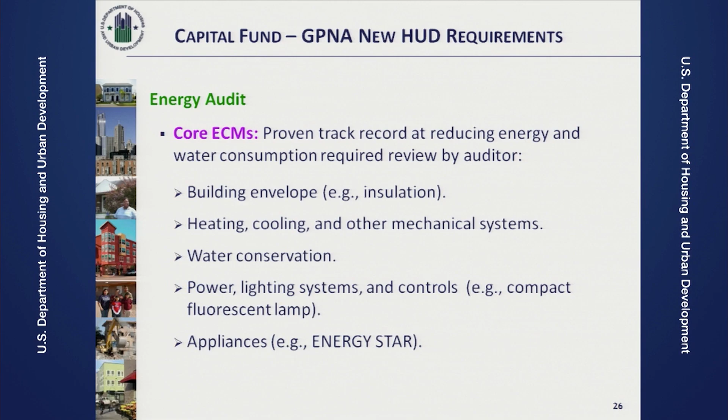Water is a quick payback. Toilets nowadays are 1.6 and 1.2 gallons as opposed to 6 gallons from the old days. Power and lighting systems and controls, like compact fluorescent lights, you notice this when you go to Home Depot anymore, that's getting to the point where that's all you can get. Appliances, purchasing Energy Star appliances - the new capital fund consolidated rule specifically requires you to use Energy Star appliances unless it is not cost effective to do so.

So you have the core ECMs, and then the next thing is advanced ECMs. Advanced ECMs are generally more difficult issues to deal with, like fuel conversion technologies such as energy management systems, or energy generating technologies like renewable energy, solar, geothermal, and one of my favorites is wind powered - I see the windmills out there as I fly across the country. So those are more advanced energy conservation measures.

When you look at your ECMs, one thing we think about is what's the payback - what's the initial cost and how much am I saving each year, so how long does it take to pay back that initial cost. The rule breaks it down into 3 segments: 5 years or less, 5 to 10 years, and greater than 10. This gives you a sense of which ones give you the biggest bang for the buck and pay you back quicker.

That covers all of the basic requirements for the energy audit that we wanted to share with you today. We have a lot of information on our website at www.hud.gov. If you go to Public and Indian Housing, you'll see across the top the capital fund. When you click on the capital fund, there's a drop-down screen with a variety of things like funding as well as the physical needs assessment. You'll find program descriptions, frequently asked questions that are regularly updated, and the GPNA software, or the GPNA tool as some like to call it.

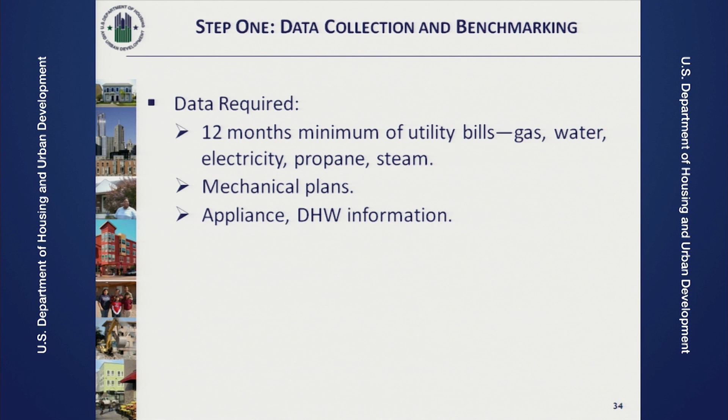All right, so what data is required? Step one is collecting data. Twelve months is the minimum utility bills we need to gather when doing an energy audit. Twenty-four months is preferable, but with twelve months we'll be able to do a profile of the building, looking at not only electricity, but gas, water, and propane or steam, which some of you will have depending on where you're located, and put those all into the calculator. We also want to look at mechanical plans and understand what type of equipment we've got in the building.

In order to do the benchmarking, why are we doing it? Because it's really hard to measure, hard to manage, if we haven't done any measures. So the benchmarking helps us take a first step in determining where this property stands against its peers - is this a high performer, is it a low performer, and really, what's the magnitude of the opportunity? That's what benchmarking allows us to do.

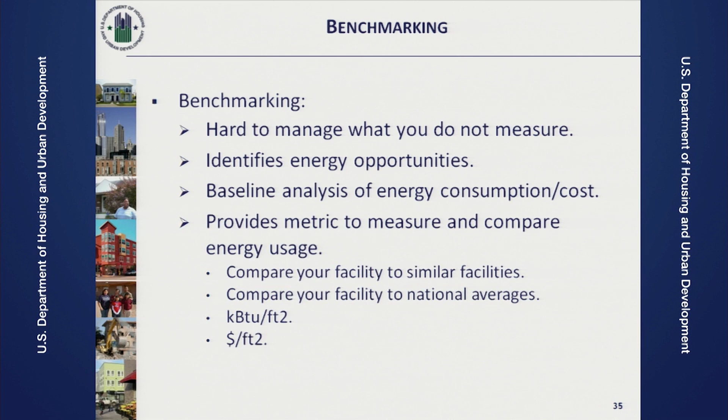The other thing that benchmarking really allows us to do is to take these multiple inputs, gas, electricity, propane, and put them into one common denominator, one common measure, and we call that energy intensity. You'll see at the bottom of this slide that's referred to as kBTUs per square foot. That's a much better measure than dollars per square foot, which depending on where you are in the country could vary widely depending on what you're paying for electricity. If you're in a state that has coal powered electricity, it's very cheap. Other places, much more expensive.

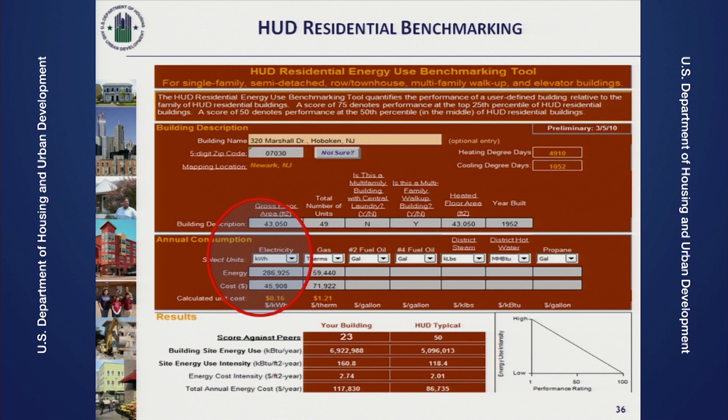So some of you may recognize this slide. This is the HUD residential benchmarking tool. What I've circled here is a couple of the outputs as we're entering data into the benchmarking tool, a couple of the things that are going to be of use later in the slideshow. These are the outputs that are talking about what that energy intensity is, what the usage per square foot is, what the total annual usage is.

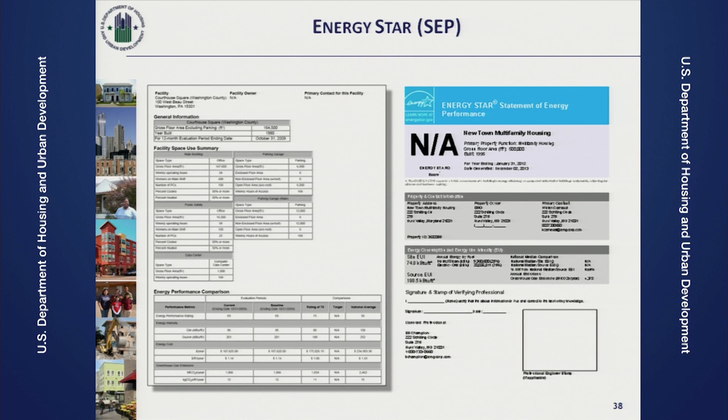This is another acceptable benchmarking tool. HUD is okay with whichever one of those benchmarking tools you use, as long as you're doing the benchmarking.

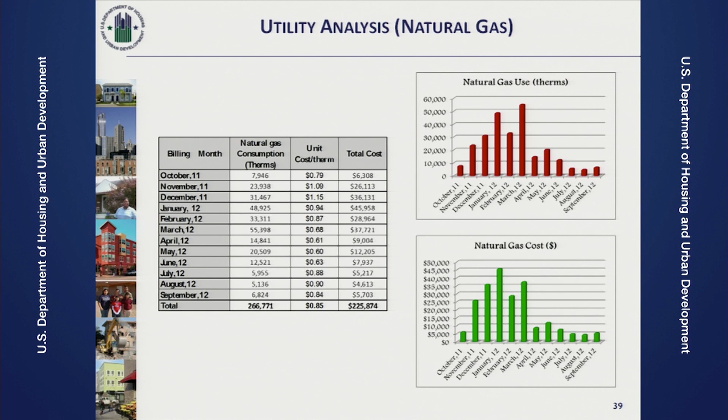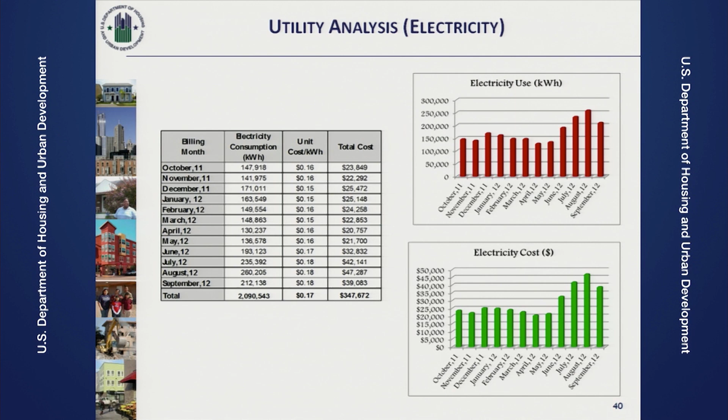This is electricity, and likewise, if you're looking at the spikes in electricity there, that's during air conditioning season. We can easily look at that, and this one actually has a much cleaner profile where you can say, okay, I can predict what the base load in this building is. For electricity, base load is lighting, higher than anything else. Appliances, what we call plug load, comes after that. But it allows us to really take a look at what savings would be from new HVAC, what lighting would likely deliver based on real estimates.

So from that benchmarking and the utility bill analysis, then we go into the actual energy audit. In the energy audit, we're doing a review of all the energy consuming components and coming up with ECMs, energy conservation measures, and ranking them based on payback.

So what happens after the energy audit is we produce a plan. The plan really is a ranking of what are the opportunities, and then how do we prioritize and put those in a logical order. We want to capture as many of those that have paybacks associated as possible.

The so-what of how we're doing it now under the HUD program is we are entering those energy conservation measures into the HUD tool and matching them up with components that are in the HUD tool, so that when we're doing life cycle replacement, we're also looking at what a more energy efficient replacement would be. We're doing that time and time again for our appliances as well as major components. In addition to that, we're looking at our viable candidates for renewables, solar, wind, geothermal. We call those advanced ECMs.

So we've covered this a couple times: core ECMs, insulation, building envelope, low flow water devices. If we haven't said it already, we've talked a lot about energy, but water conservation is very much a part of what we're doing here. So whenever we're talking about the energy audit, it really is a utility audit. Water is very much a part of everything we're looking at.

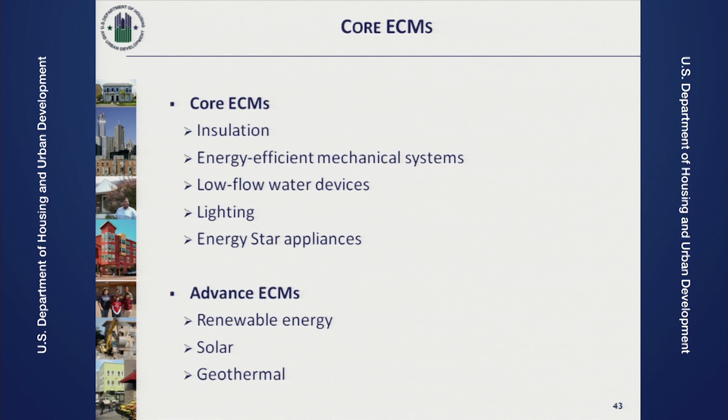Advanced ECMs, renewables, solar, geothermal, and wind. Regional ECMs - in a cold climate, big paybacks are from HVAC and building envelope. In a warm climate, it's all about air conditioning, roofing, and again building envelope, window tinting, awnings, and shading - passive solar measures. Site lighting and interior lighting is good everywhere, high paybacks there. Domestic hot water heaters, whether individual apartments or a central system, applies everywhere. And then your green solutions, renewable, advanced ECMs.

Many of you may be familiar with another HUD program called the Mark-to-Market program. In that program, several hundred properties were studied afterward to find the most frequently occurring items that made it into the rehabs funded under this program. As you can guess, water conserving devices - low flow toilets, low flow faucets - were the number one most frequently occurring item that got rehabbed. Appliances next, then heating and cooling, and domestic hot water heaters. Multifamily apartments are a big user of hot water, a 24/7 operation, so lots of use means lots of opportunities.

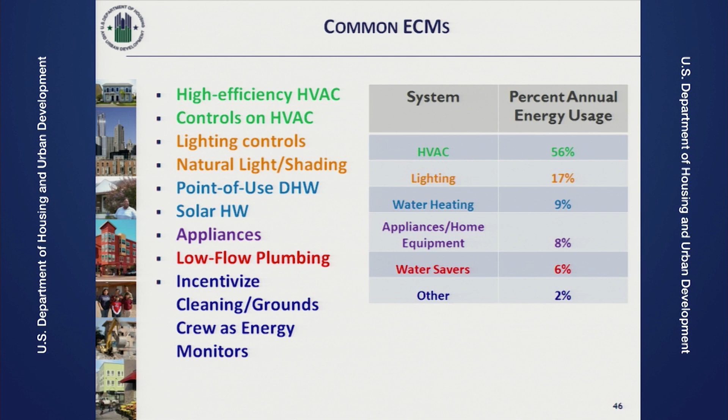This is more from the Mark-to-Market study. CFL was implemented, compact fluorescent - those are actually now on the way out, and LEDs are on the way in. You can see the rest: refrigerators next, then water-saving items and HVAC. This particular sample was a 300 apartment building sample.

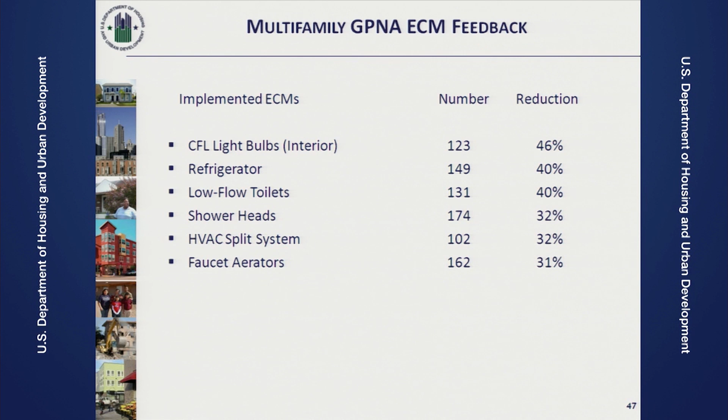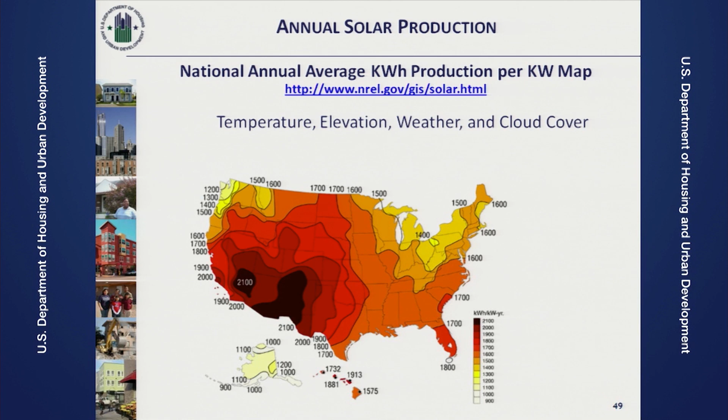Let's talk a little bit about advanced ECMs. This is a cool website, it's in your slides so you can check it out on your own. This is the NREL website, the National Renewable Energy Lab. It allows you to pull up your site and look at things like the potential for solar power on your site, the potential for wind energy. It's one of the tools consultants use when looking for these advanced ECMs, or you can do it yourself if you're doing your own energy audit.

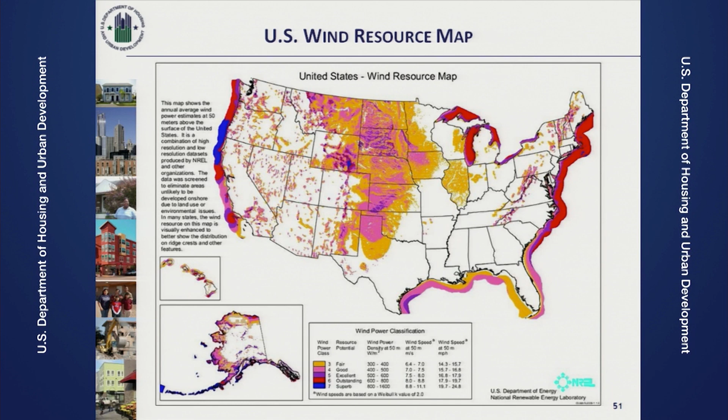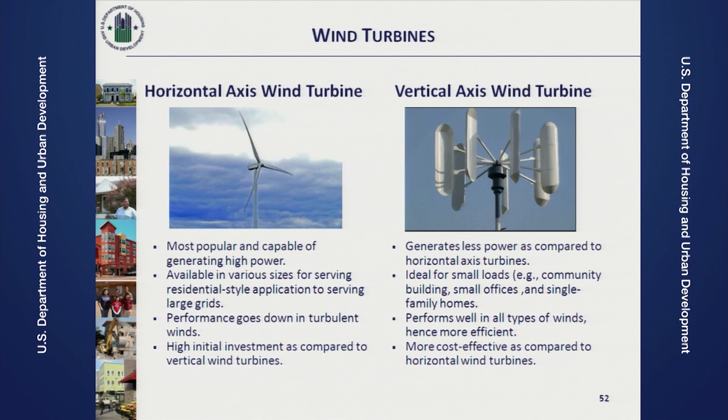This is the PV Watts calculator, which is the solar calculator. This is the wind resource map, where you can look at your site and see if it's in one of the high propensity wind areas, which would mean a next level study for wind would be appropriate. Here's a little bit on wind energy - there's two different types: the big turbines that you see, and small vertical axis turbines appropriate on some smaller buildings, city mounts, and other places. We've seen a few of those in urban areas as well as more isolated sites.

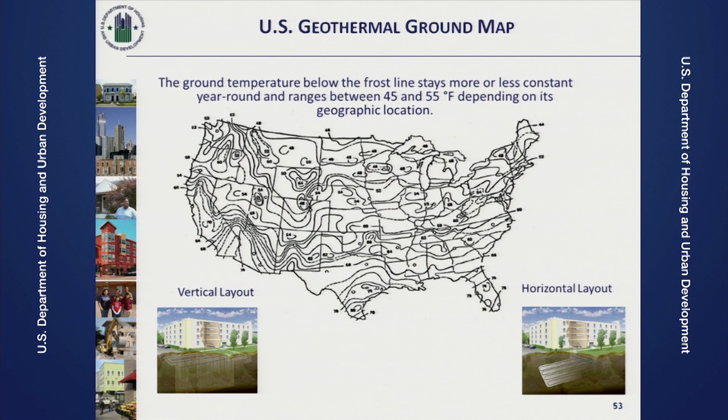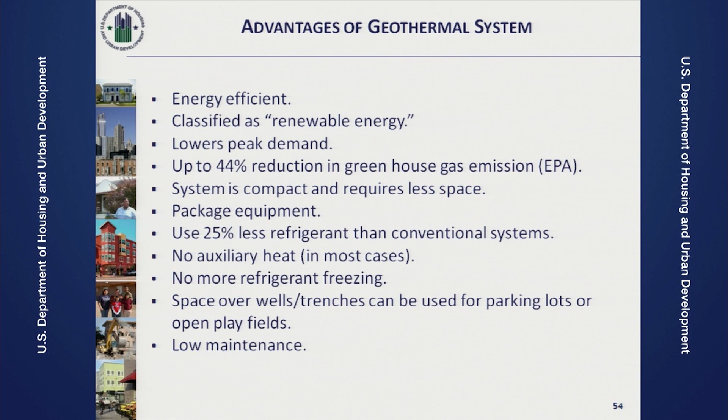Geothermal is really an up-and-coming technology. It involves putting water loops or solvent loops underground, taking advantage of the latent heat underneath the top layer of the earth. It can be done vertical, deep well layout, or horizontal layout. This allows us to look at a couple of different scenarios depending on how the site's located, realizing a lot of these properties don't have a lot of space. These graphics can help you do a study to preliminarily determine if that would be of benefit to you - that's all about heating and HVAC. Advantages of geothermal include up to 44% reduction in greenhouse gas emissions and 25% less refrigerant.

So field methodology - once the energy audit goes in place, what's going to happen in the field? First, the green PNA team typically includes an architect and an engineer. As we said before, HUD requires BPI certification, LEED, or certified energy manager. During the site access phase, those professionals are going to be out looking at units - it's a 10 to 25% access requirement, 100% access to common areas and mechanical areas. Typically it's multiple days on site for the team of engineers.

During that time, they're going to be collecting utility bills and likely pulling drawings and history of what you all have paid for retrofits in the past.

What are they going to be taking with them? So an infrared camera, we'll show you a picture of what one of those looks like, but those are becoming more and more common. Data loggers for actually recording how lights are coming on and off, temperatures being adjusted, humidity and temperature sensor, light meter. We're going to be measuring to see if we're overlighted, say in common areas.

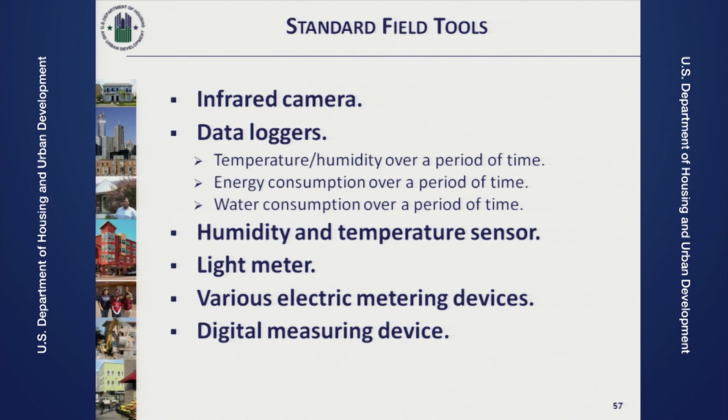And you hear folks talking about de-lamping, but if we're going to be doing a lighting retrofit, in many cases we find that common areas are overlit, and not only can we put in more energy efficient devices, but we can take the overall lighting levels down to a more reasonable level.

So this is a picture of what we see using our infrared camera. This is a thermal image of a condensate return pipe as part of a steam heat system. What this allows us to look at is a couple things: is there enough insulation on these pipes, and are the systems operating the way that they should be?

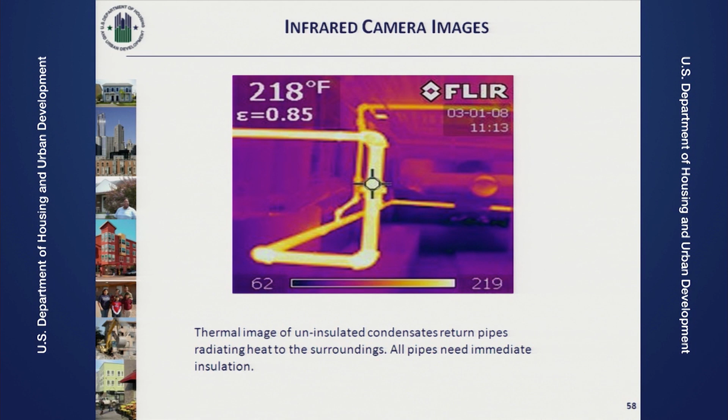There may be another picture coming up of a building envelope. So, standard tools used for the following.

I don't need to read through these for you, but we're looking at thermal insulation. When we get into an attic, we're taking a look at how much insulation is there. There are high paybacks from putting additional insulation, so if we're going to calculate the R value of what's there, we need to look at what's there. And then the third bullet talks about the extremely technical Ziploc stopwatch method of checking low flow sinks.

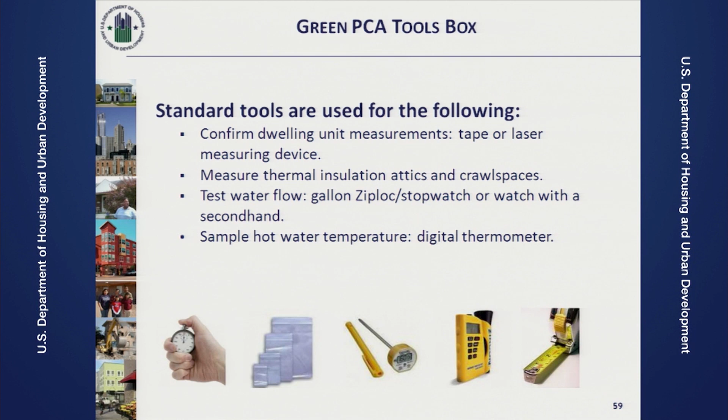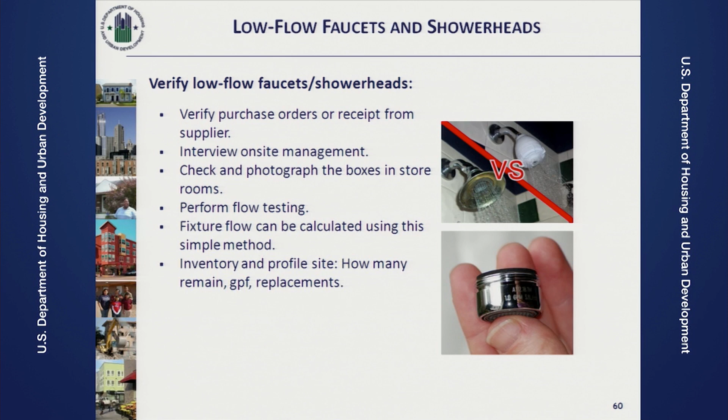Bill, that's one of your favorites. All right, so low flow faucets and shower heads, I just talked about that a bit. Big paybacks associated with those, but pretty low tech. So we can usually tell by looking at the actual fixture itself if it's been retrofit or not, but easy enough to measure if it's low flow or not. And you can do that yourself too.

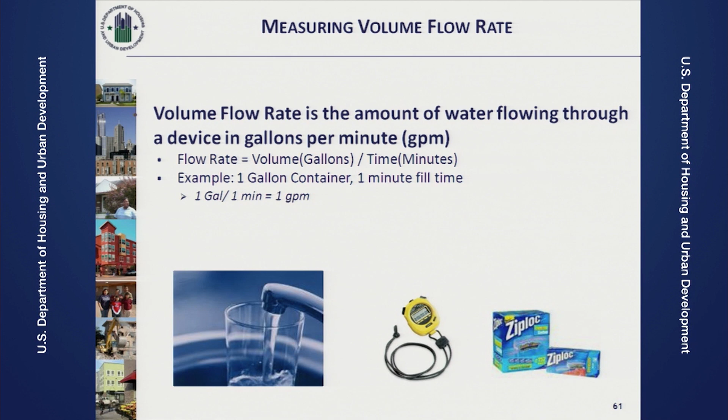Flow rate is just the measure of gallons per minute. You can look up the standards of what those are and then do your own test using a measured container like a Ziploc bag or a known amount of cups in a measured amount of time.

Air duct testing. We hear quite a bit about air duct testing. So what we're looking for in air duct testing is, are there leaks in the air ducts, so you're blowing conditioned air through the ducts that's not making it into the apartments. So this is a tightness test, and that's the number one reason why you're doing it. You also hear this referred to as blower door testing.

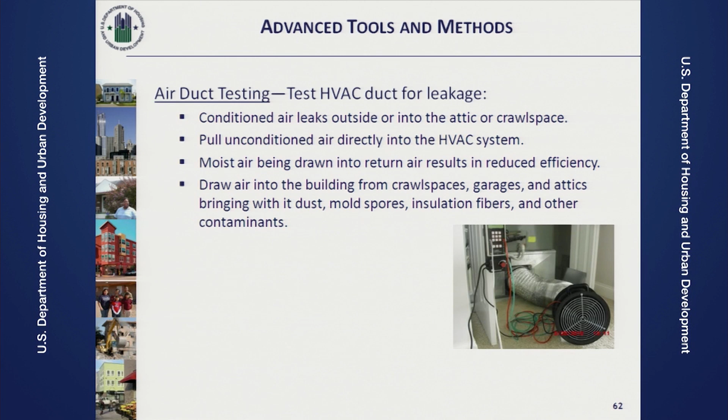So we see that this is very appropriate in single family, scattered site. It's of limited value, but of some value, in elevator apartments or townhouses.

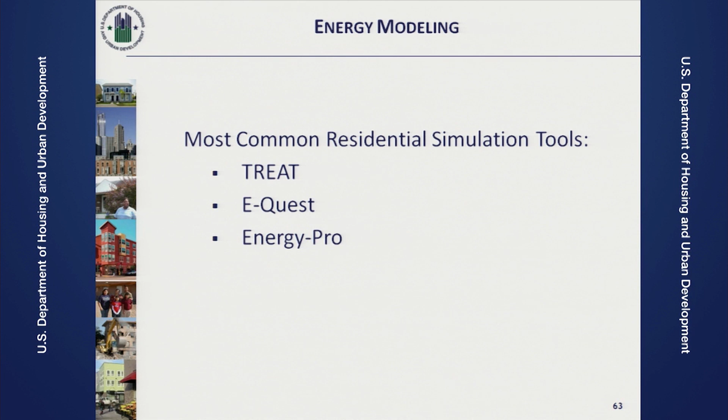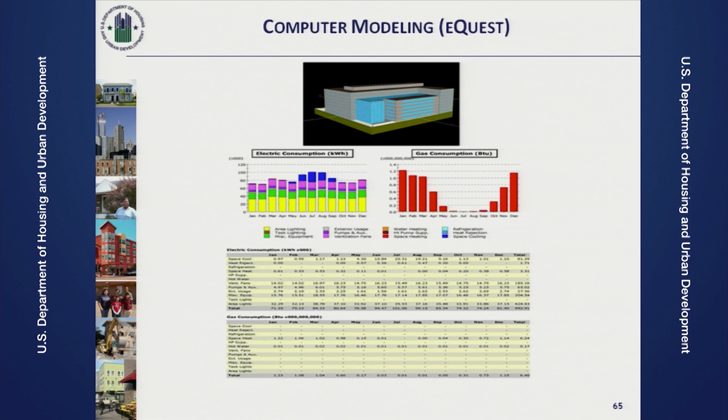But what we're trying to do is build a model of the building and then predict what different changes into the building envelope, into the HVAC system, are going to deliver to the overall energy usage profile of that building. This is what an eQuest model looks like. If you can see at the top, we call it energy modeling because we basically recreate a box-type model in the computer of what that building looks like and then run the effects of changing out different building components into the model. And you can see the predicted profile energy usage curves there.

Energy Pro is a little bit simpler, and that's one that we often use. Okay, 12-month distribution table. So one of the outputs of these models is once you profile the building and look at your ups and downs based on the time of year, you can start really getting into the fine detail as to which systems use what amount of energy, and that really allows us to calibrate that against what the payback for replacing that system is.

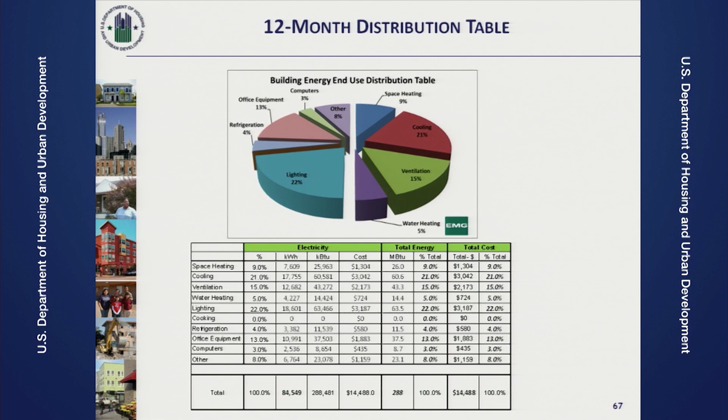If you're getting something less than this, then it's likely you're getting a level 1 audit, which may have some rule of thumb recommendations, but isn't going to end up being enough to populate the HUD tool.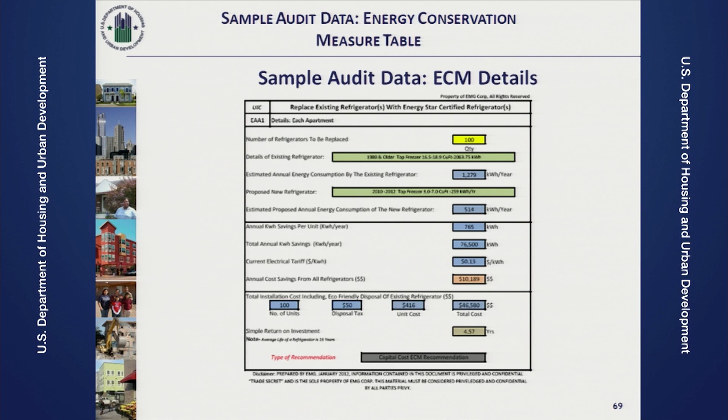One last component before I turn it over to Bill to walk through the tool is a little discussion of marketability. So we hear a lot about marketability in a number of HUD programs. What are we talking about? So marketability has a couple themes.

Really, marketability in a nutshell is if this property were not in the HUD portfolio, would it be able to compete in the open market? So we're looking at things like curb appeal. These properties aren't meant to be luxury apartments, but they're not meant to be substandard of what's available out in the competitive market. Landscaping should be part of it, air conditioning, carpet if it's appropriate. Modern appliances are appropriate, and Energy Star modern appliances are a part of what HUD expects here in these apartments, certainly after we do the GPNA.

These buildings have security systems, amenities like common area, playground, and other amenities. So those are the things that we're looking for to make sure that this portfolio, for each portfolio, it's maintained in a market level standard, and there's a place to put these items in the overall GPNA tool.

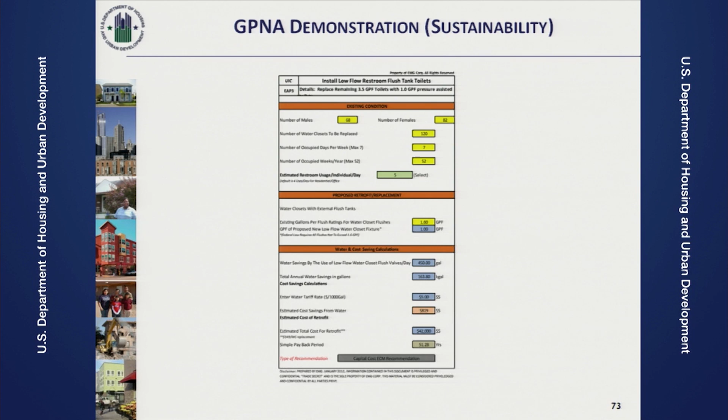This is an ECM data sheet or a simple audit data sheet for low flow toilets or water closets. You'll see that you can go from 3.5 to 1.6 to 1, and there is an energy savings in gallons per flush and in the actual use of the water.

Again, we look into the tool and we assume that everyone on the training knows how to run the actual tool. The addressing of the simple steps of creating building sets and unit sets has all been discussed in other trainings.

So we are at the part where we've discussed how to create a projection. You start by running a cost projection, and just to review, you can do that two ways, by running inspection projections or actually building a cost projection line item by line item. Either way, you have to start with PNA items that have already been completed in your actual assessment.

So this is the actual cost projection for an AMP in a large authority. And this is where you would start. And adding a sustainability item begins with something as simple as that.

You'll be looking in the center panel there at the top, and you will add sustainability. You will pick sustainability as your choice and go to the Add button, and you would click that. Now, when you click the Add the sustainability item, you will be asked a few questions.

You should be prepared to select the category to which the item belongs. That would be the site, the building exterior, the building system, the common areas, or the units. You will be expected to find the actual PNA item that's being upgraded, and that'll be in your list of actual PNA items. And you have to be prepared to answer a set of sustainability line item details as well as the sustainability data.

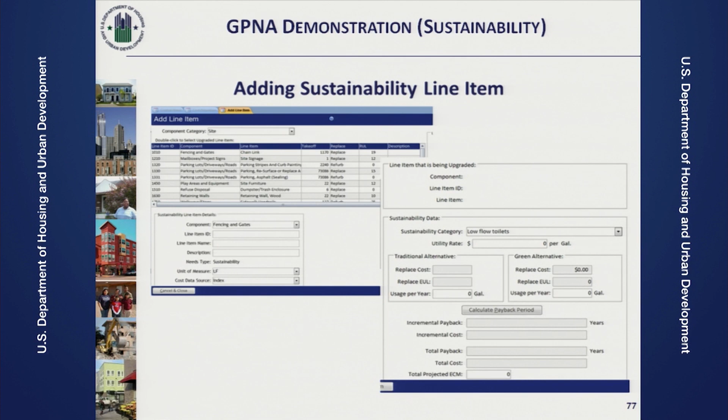In the detail steps, and this will be covered in the demo as well, here are the individual items that you'll need to know. The list looks like it may be a little long, but it's not that difficult to enter these items.

First, you'll double click on the item from your PNA that you'll be upgrading. You'll give it a line item name and number - the numbers just identify where in your list they'll fall. The line item name would be the item, let's say, for sake of argument, Energy Star refrigerators. You'll enter a description, a more detailed description of the component, and the proper unit of measure. Right now the tool defaults to lineal feet, but you could choose square feet, percentages, or even each.

You'll enter the cost data source. You have a few options there. Cost data could be gained from bidding, internal sources, or industry standard guidance like RS Means - that'll be asked for in the cost index. So you could use RS Means, Marshall and Swift, or any other industry guidance out there. The cost index reference is the actual reference number used in those industry standards.

You'll enter the replacement cost for the new item, the local multiplier, the estimated useful life data source - where that information comes from, the index and the reference - as well as the replacement EUL: how long is this new item expected to last?

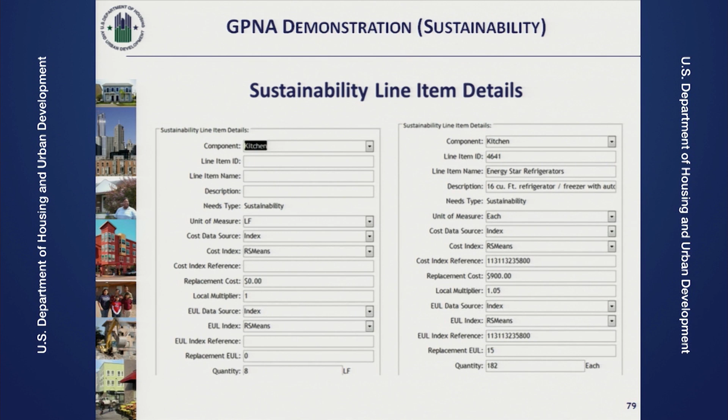Here's an example. On the left-hand side is the default screen, what comes up, and on the right-hand side you'll see where that information is entered. We'll be walking through this in the demos, but the left-hand side shows what you have to enter, and the right-hand side shows one that's completed.

Now you'll also be entering sustainability steps. If you remember, on the lower right-hand panel, this is the data required to generate the payback, energy audit savings, and projections. In this set of questions, you'll enter the sustainability category, which could be Energy Star units or low flow - just the type of energy savings items you're going to use.

You'll enter the utility rate - data you'll need to know before you start. Here in Maryland, we use about 12.5 cents per kilowatt hour, $1.55 a therm. These are things you'd need to know. We use about 4.5 kilogallons of water, 4.5 cents per kilogallon.

So you'll calculate the payback period by entering that data, and you will use the project cost over 20 years button to actually create what the projection looks like over 20 years. If you're satisfied with that projection, you insert it, and that will put this item into your cost projection.

Again, on the left-hand side is what the GPNA tool will be asking for. On the right-hand side is one that's completely filled out, and you can see it's filled out because you do see the actual payback on the right-hand side.

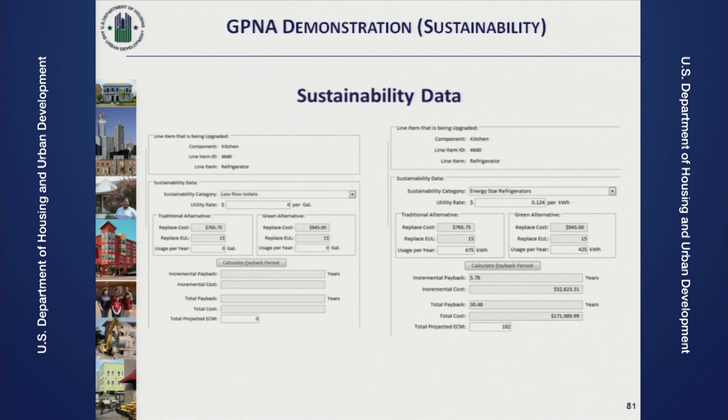Then again at the bottom, you'll be looking at the projection. You'll press the button at the top, project cost over 20 years, and that will fill in what years you'll be implementing these savings. Here you could see it happening twice over the 20-year term, and the difference between those two years is 15, which is what we've entered as the estimated useful life.

Then you insert that projection into the table by pressing the button, and you will see highlighted in green, there's the sustainability item. As Matt touched on briefly, there are also marketability items that can be added to the GPNA tool.

Again, these all start with running the cost projections. This part should be nothing new, having seen the other WebEx trainings. Adding a marketability or even an accessibility item really follows the same process. I've added accessibility because it's the same questions that need to be asked for whether it's a marketability or an accessibility item.

There are two ways to generate a marketability or an accessibility item. You can add a new line item, done by selecting new item from the drop-down and entering the appropriate data. This is a much simpler process than the sustainability item. It only asks for the item, what it is, the general data, and then the projection over 20 years.

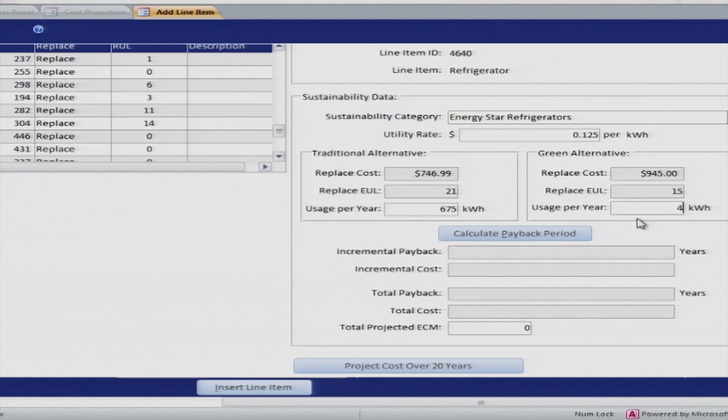My usage per year was 675 kilowatt hours. My new refrigerators cost $900 times the 1.05 multiplier, had a life of 15 years, and they only use 425 kilowatt hours. With both the line item detail filled out and the sustainability data completed, I should be able to calculate a payback, and my incremental payback is 6.6 years.

The incremental cost is $60,195.48. So I'm going to project those costs over 20 years, again, by choosing the 100% replacement cost immediately. I replace 304 refrigerators today, and again in year 15, which is my useful life.

This data I'd like to insert into my cost projection, and item number 4641 should be down here in green. And here we are. So you can see the difference here. The sustainability item is in green. The balance of the PNA items are clear.

Okay, I'd like to do the same for a marketability item. The process begins the same. I would go to the add line item, marketability, and add. I have two choices for adding a marketability item. I can add a new line item or add one to an existing item. Of course, I haven't created any, so I'm going to have to choose a new item.